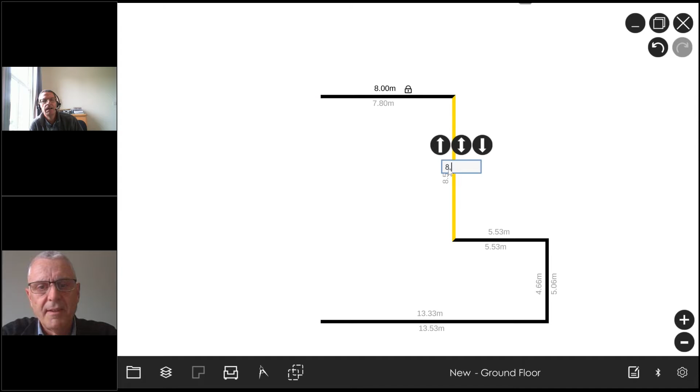If you want to adjust their length, you can adjust them by typing in the new dimension like this and pressing an arrow, and it adjusts that length, then goes on to the next line and adjusts the length, and so on. This way you're taking an accurate set of dimensions around the building.

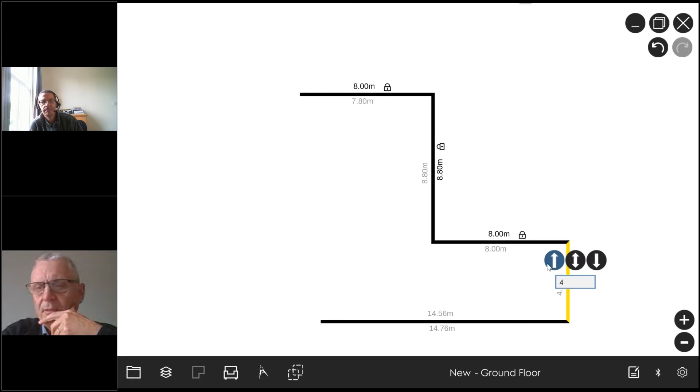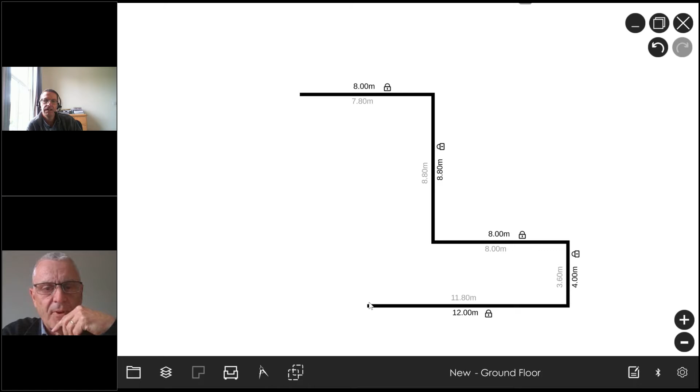If you've got a Bluetooth laser measurer, it will automatically grab those measurements and send them through as well. The addition of a Bluetooth laser with this program leads to high levels of productivity, that's for sure.

If you want to curve a line, you just hit a line like this, and then you can curve the line, you can make curves. If you want to do angles, you can do angles as well, and you can come off those angles at right angles. So pretty much anything that is out there, we can draw.

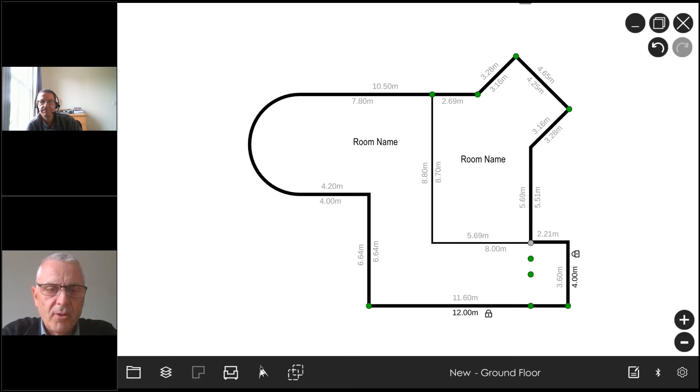At the moment, it's drawing in 2D because that's the way most people envisage. If we want to go into aerial mode, you can see I've actually produced a 3D model. And in this mode, the model is completely editable. I can make things bigger and smaller.

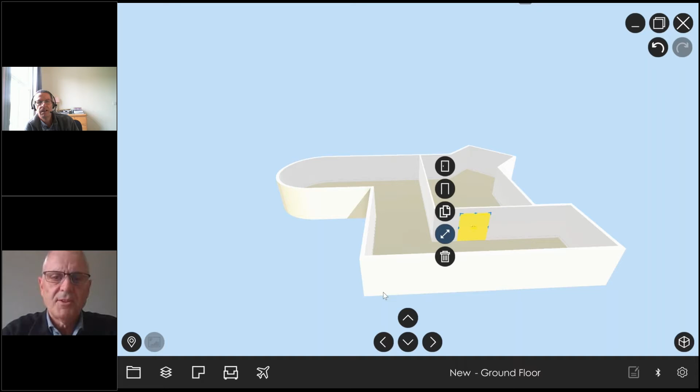I can add doors in, any type of door. I can resize those doors. I can move them around the building, and so forth. So this is what we talk about being a completely 3D interactive model.

I can open and close those doors. I can change the colors of the floor and whatever the case may be. And I can put in windows and doors and resize those as the need fits. So that's really quickly how you draw.

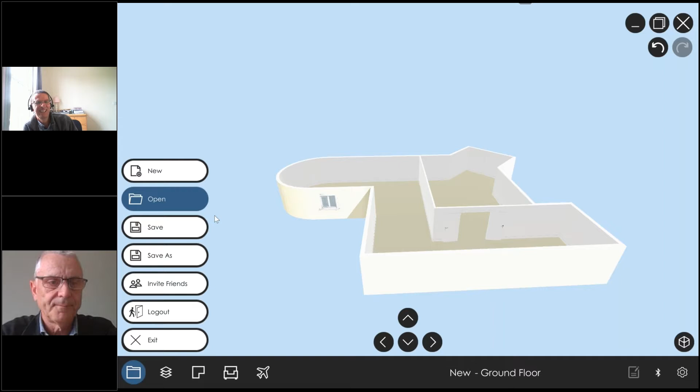Let me just open up a file that I prepared earlier, which has some of the other elements that we were talking about. So this is a sketch I prepared earlier. It's a 2-level commercial building. This is the bottom level. I've just randomly named some of the rooms.

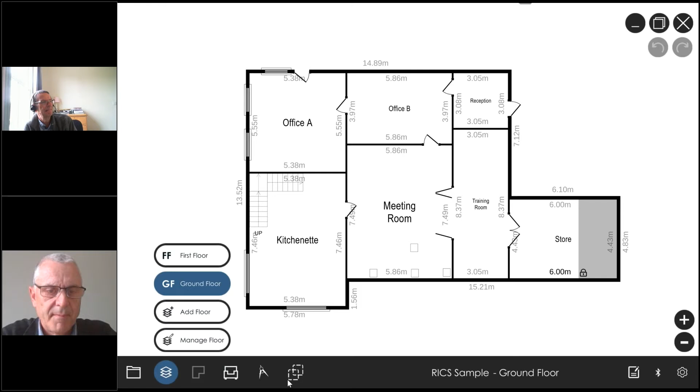And if you go to my top level, if you go to the aerial view, you can see it's a single-story building, a double-story building, and I can show the second story there. So it's actually produced a full 3D model.

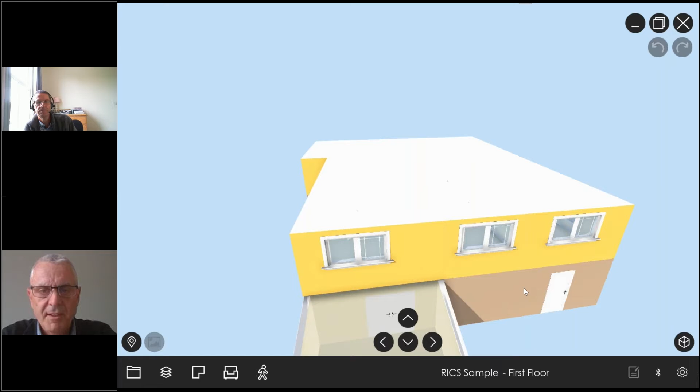If you jump into here, you can see this one has a sloping roof. I've just done that for a reason. There's a door through here. I can open and close doors as I move through the building.

Here we've got some columns, which we'll talk about in a minute for those valuers that think they're important. And if I come into this room, again, stairwells. I can walk up the stairs here and onto my top floor.

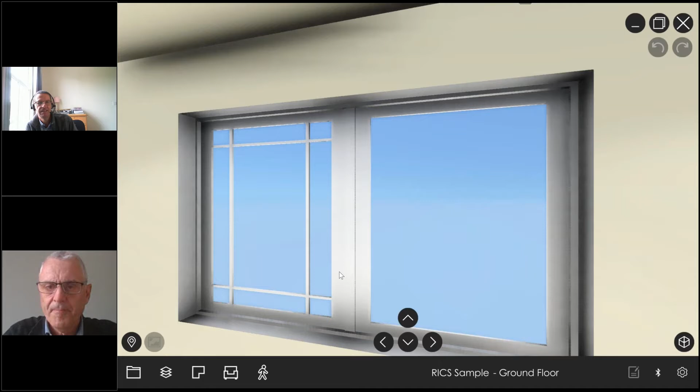So the cost of building a 3D digital model like this is about the same cost of doing a 2D floor plan with other software. It just pulls it together so quickly.

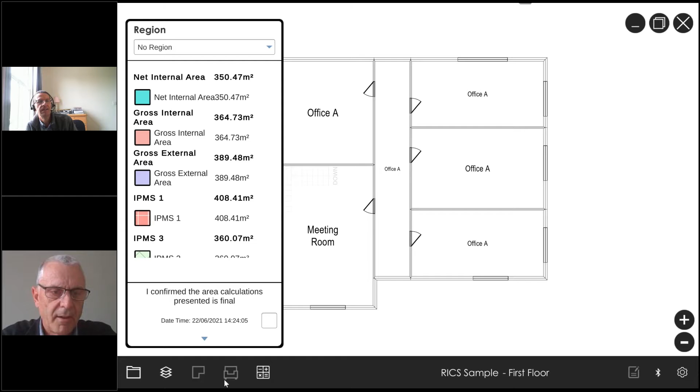The real smarts happen here in calculate mode for a property valuer. I go back to my ground floor. You can see straight away here that we've divided each of these walls into 2 segments, and this allows us to measure to the internal face, the middle, or the external face.

We also have identified this grey area over here as being low head height area. You know, remember the room we were in? Indeed, yeah. And so essentially now we can do multiple simultaneous equations.

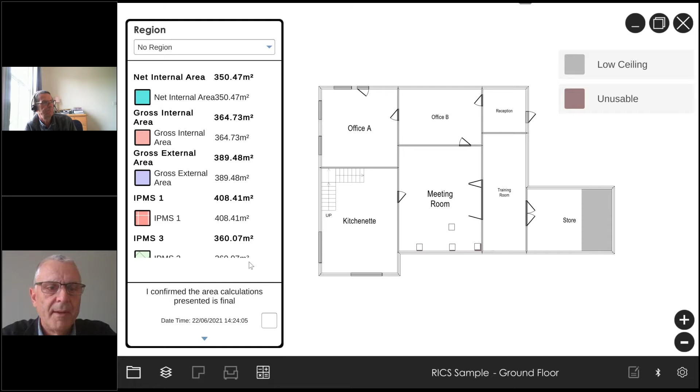So here I've got this preset. It calculates my net internal area. You'll notice that it's omitted to take into account columns and the stairs, and it's also omitted to take into account the low ceiling area. But close that one down.

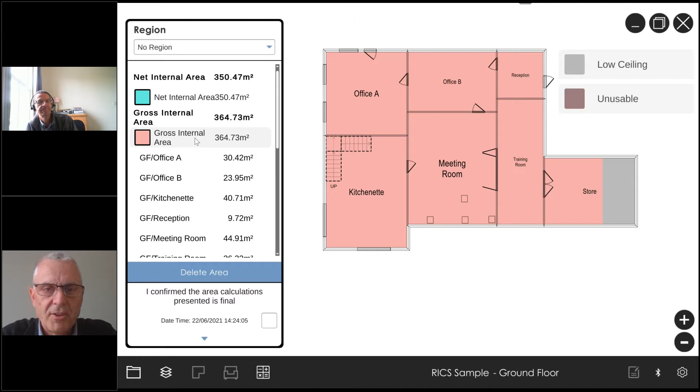You can also do my gross internal area, and you see then that it's taken into account the internal walls. Or my gross external area, it's taken in the external walls as well. And all this is done based on how the user has configured it.

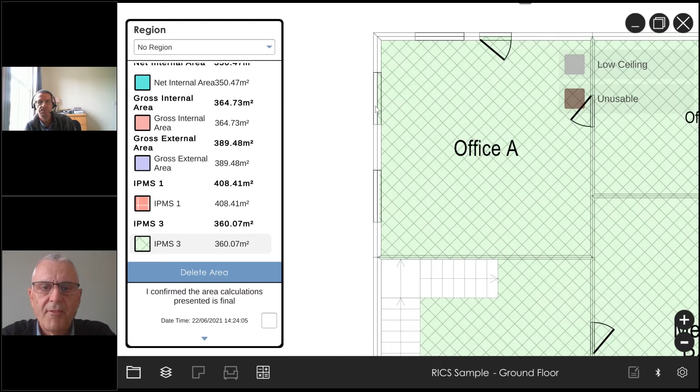IPMS1, which is similar to gross external area, I can calculate there, and IPMS3, which is similar to net internal area. You'll see that these windows are where we've taken the distance to the dominant face. This particular window we've taken in 100 millimeters, and this one's gone in 50 millimeters to the dominant face. We can come back to that in a little bit.

The whole process of eliminating low head height areas, columns - if you look at this space here, the area between the column and the wall is less than 250 millimeters. So we've been able to isolate that area as unusable area.

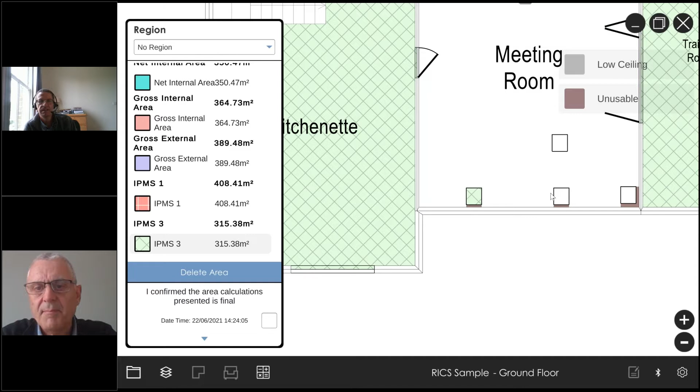And these are the assumptions that a valuer would make most of the time. But should he or she be confronted with a particular case where maybe the client says we're going to remove those columns next week, you say okay, well in that case I can just click on these columns in the room and add them back into the area calculation, same with those areas between the columns. Everything can be overwritten manually at this level.

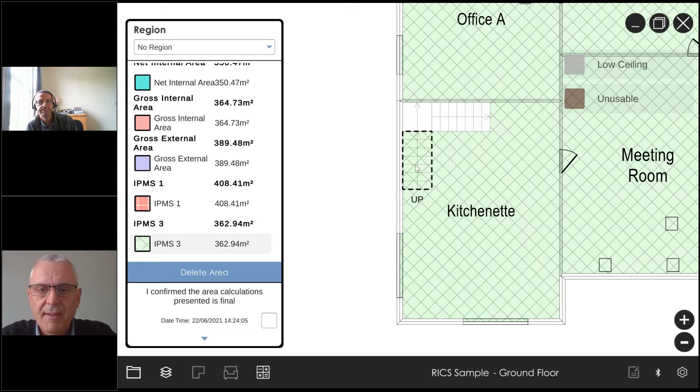So if I wanted to include the stairs, we have a three-way switch for these stairs. I click the stairs once and it's going to include the stair, or the area under the stair, whichever. If I click it again, it's going to include both the stair itself and the area under the stair. Or I click it again, it'll exclude the stair completely.

So the valuer has got complete control, manual control, over how the program works and how at the end the calculations are completed. But if it's set up correctly, you would anticipate that maybe 70%, 80% of his jobs would go through pretty much as expected.

No, that's great, and I suppose it highlights for me the challenge, particularly globally, where there are these multiple measurement standards. Obviously we're very keen that over time the world adopts the international property measurement standards as a globally consistent piece, but we are very mindful that we live in a world of multiple standards, of people measuring a building for multiple purposes, and perhaps having to report at least in one or two standards.

And I guess what you've done is, by going to that level of granularity - recording walls both to middle and exterior, interior, and that ability to effectively include and exclude these areas - we're hopefully in the best of all worlds here, because you can effectively produce almost any kind of measurement type that has that kind of component approach of what do you add in, what do you take out, and still the valuer has the ability to somewhat override that, or use their judgment to decide what kind of measurement standard they're working to, and also to make those professional judgments where, as ever in a different jurisdiction, the concept of low height will have a different physical measurement.

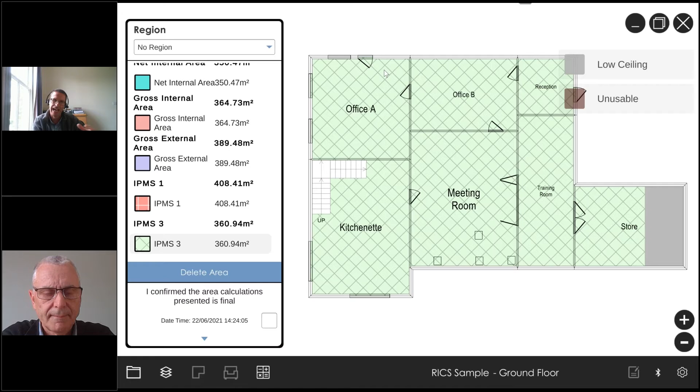So do I take it from that, and I think you alluded to that in terms of one of the areas where Unity needed to develop, that you're mixing structured information together with the visual model as well. So you're able to get the best of both worlds by having a 3D model in terms of the geometry, but also add structured data to it.

Yeah, I can give you an example. Let me know when you can see my screen. Yeah, we've still got the floor plan. I'll give you an example of where we're moving to.

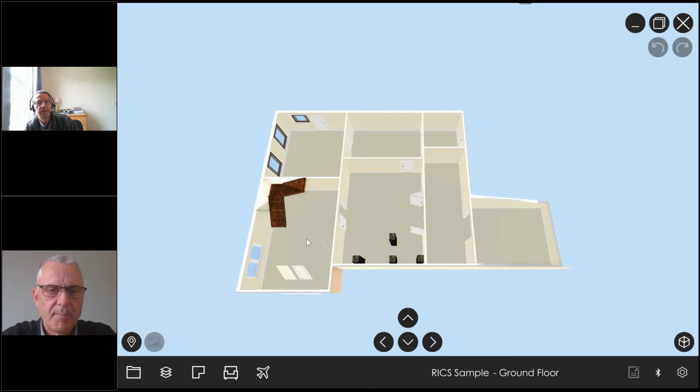If I go back into aerial mode, and into this building, we have started developing what we call 3D data collection. So for argument's sake, if I'm taking dampness readings in this building, I really do need to know where that dampness reading was taken.

So I can drag this icon onto this wall and put in the dampness reading. It might be 30%. I can save that and timestamp it. And the icon says, whoa, that's a bit high, and gives it a big red cross. If the dampness reading was taken up there and it was 10%, I could save that, and now that's saying that's quite an acceptable dampness reading.

So while most data collection now is 2D, and we're developing two-dimensional data collection for a number of customers now, there is a role now for three-dimensional data collection moving forward, where the third dimension is actually important to the collection of data.

Well, that's great. So in terms of usability from a customer perspective, obviously our RICS membership goes from sole practitioners through SMEs up to large corporates. How are you integrating this product with either large corporates or smaller firms in terms of integrating it with their systems and their workflows?

So there's a couple of key considerations with working with smaller companies. They can tend to get away with using our applications as an app, so we have the ability to export or share a URL, which shares the model, export a JPEG, export the data to a CSV file, which they can suck into an Excel spreadsheet and things like that.

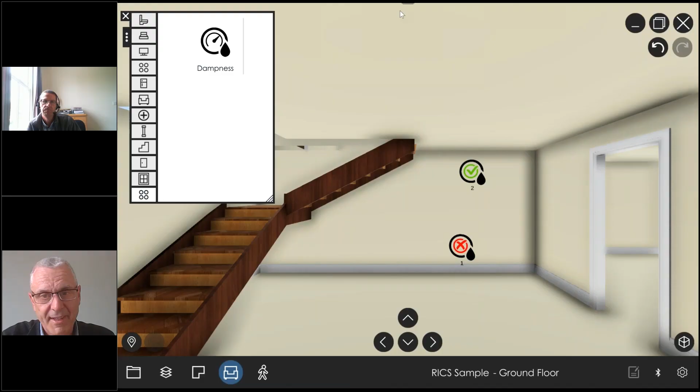For large organisations that are multidisciplined, there's no other product on the market you could give to your surveyors, then give to your real estate agents, then give to your energy assessors, and have them all using the same tool. It could be completely configured differently for each of them, so it's optimised for each discipline. But it means when somebody's gone in to do the EPC, then they're heading out to do a survey, they grab the same model and add to it. And if the property comes on the market and they want a floor plan, they grab the model again, add more data to it, and the organisation keeps building on this digital model, becoming more detailed as it goes on.